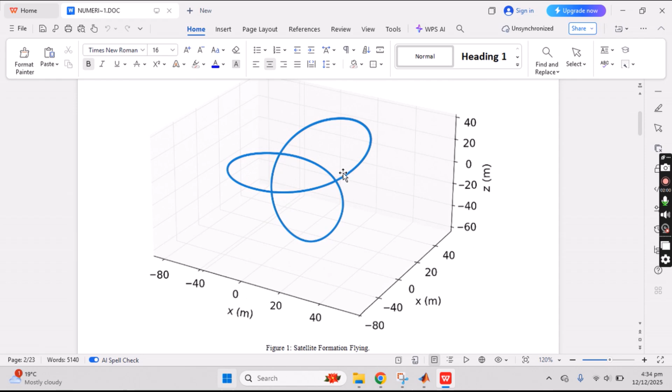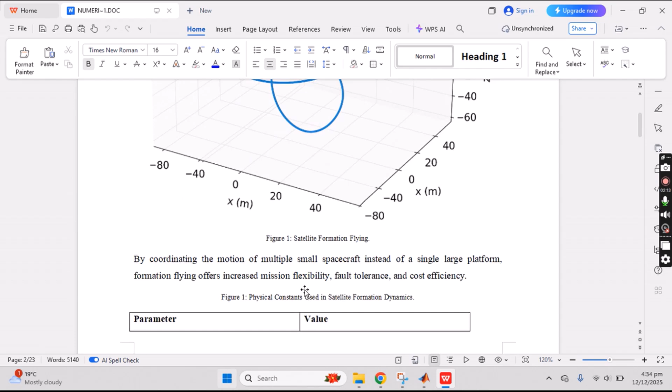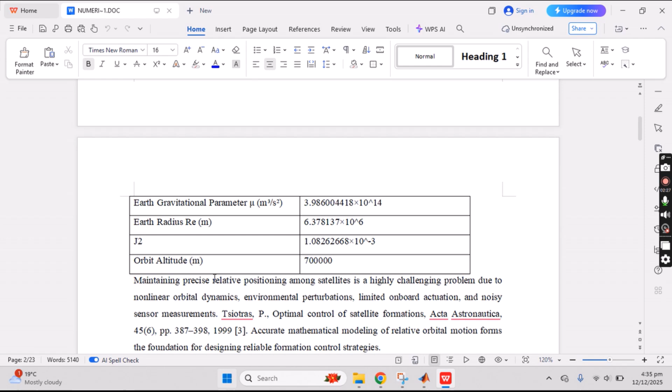The introduction basically provides us the relative motion for satellite formation flying. The satellite is moving in what we call relative motion, and this is basically a circular movement around this type of circle. So here I have defined the physical constants used in the satellite formation, parameters like the orbital altitude, the radius of Earth, the gravitational parameter, the J2 constant, and the Hill-Clohessy-Wiltshire state matrix is defined as well.

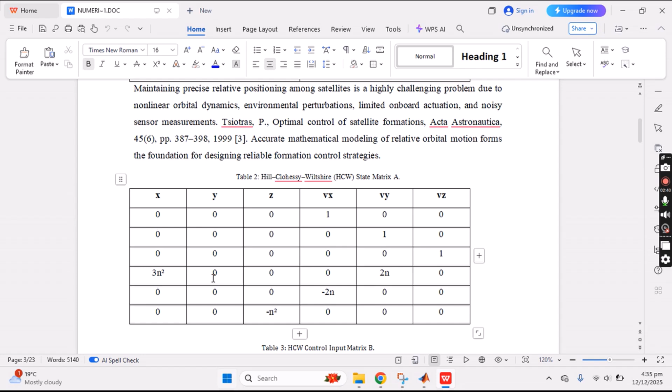So next one is basically the HCW control input matrix, defined in the column with its parameters as well. Hill-Clohessy-Wiltshire is commonly employed to describe the linearization of relative dynamics about a circular reference orbit. So next one is, just a second. Okay.

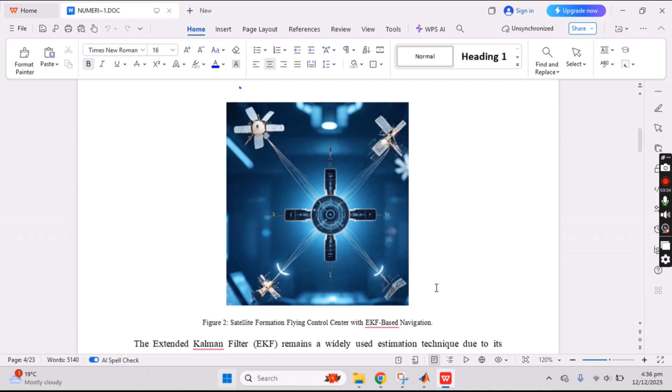So here is the satellite formation flying control with EKF-based navigation. Basically the EKF is a widely used estimation technique due to its computational efficiency and capacity to handle nonlinear measurement models. And here is the background and motivation for model predictive control: orbital perturbations, gravitational non-uniformities, differential drag, and atmospheric effects continuously disturb relative motion dynamics, with estimation challenges as well, which is related to low Earth orbits and remains standard in many control studies.

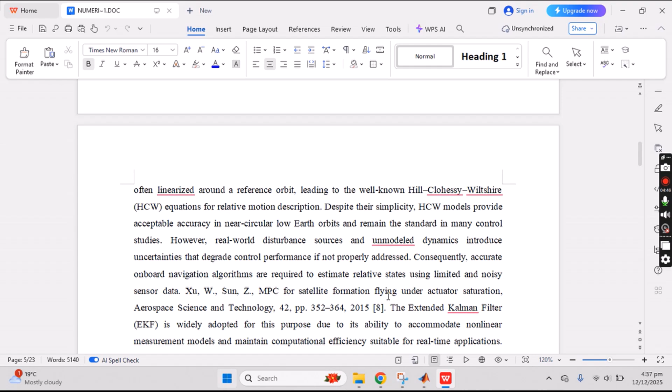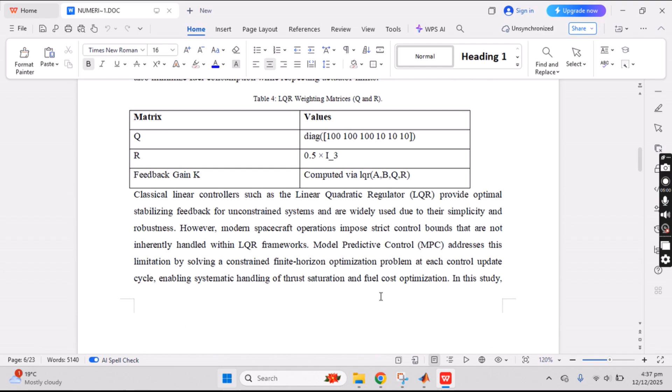And we discuss how real-world disturbance sources and unmodeled dynamics introduce uncertainties that degrade control performance if not properly addressed. So here are the control strategies and study objectives. These are the LQR weighting matrices, LQR meaning linear quadratic regulator, and the simulation framework development, in which I have added the closed-loop architecture that links the estimator outputs directly to the MPC and LQR controllers, plus performance metrics and evaluation.

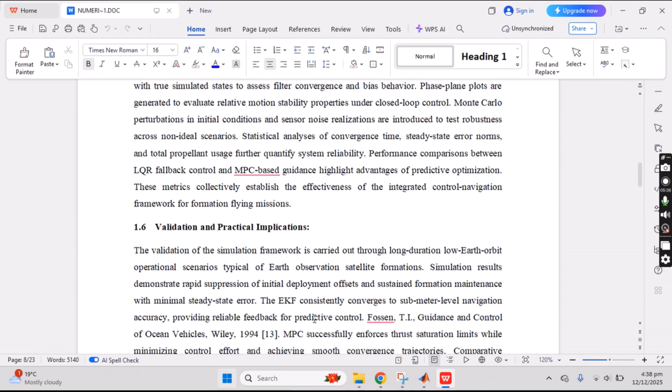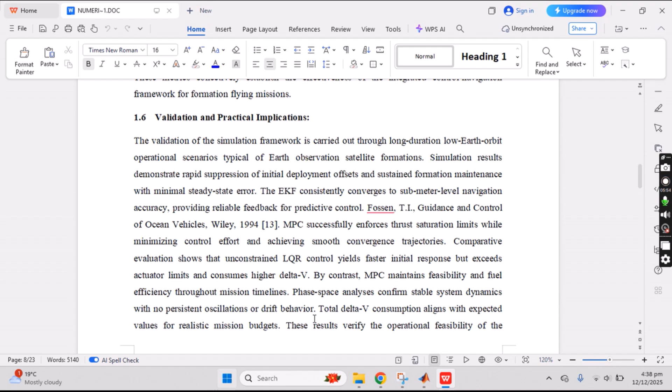So here I have defined the performance comparison between the LQR fallback control and MPC-based guidance to highlight the advantages of predictive optimization. Validation and practical implications basically define how the EKF consistently converges to sub-meter-level navigation accuracy, providing reliable feedback for predictive control.

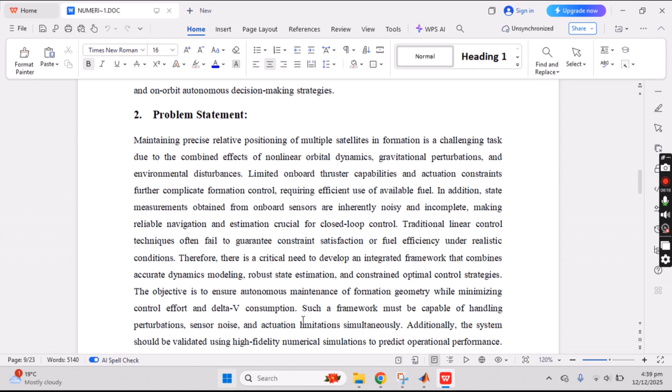So the problem statement is basically that maintaining precise relative positioning for multiple satellites in formation is a challenging task due to the combined effects of nonlinear orbital dynamics, gravitational perturbations, and environmental disturbances. Therefore, there is a critical need to develop an integrated framework that combines accurate dynamics modeling, robust state estimation, and constrained optimal control strategies.

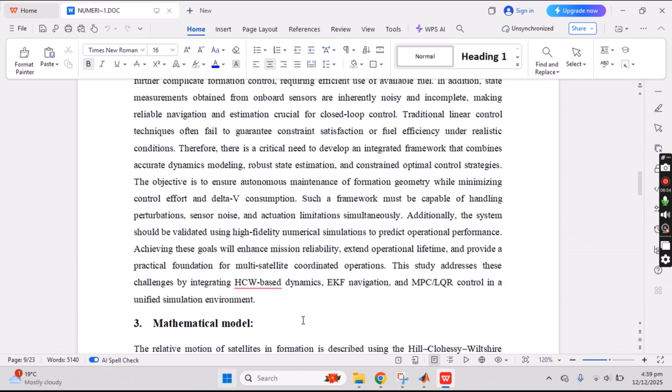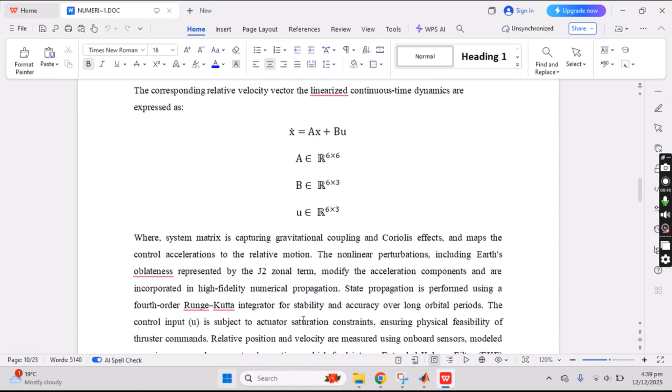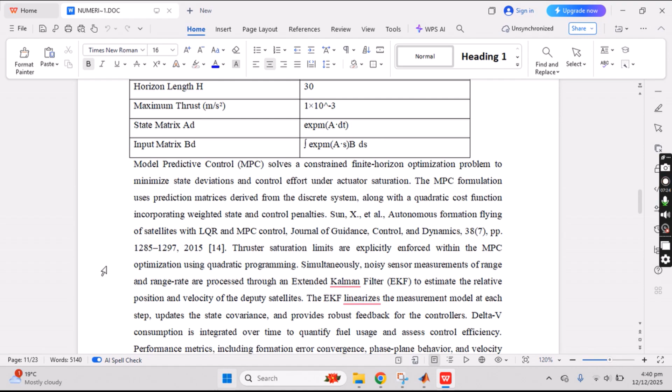Here's the mathematical model which we have defined according to the dynamics of a circular orbit. Here are the complete equations used in the linearized continuous-time dynamics. And the methodology defines the linear quadratic regulator as the stabilizing feedback baseline, and the MPC parameters are provided in the form of a table. MPC basically solves a constrained finite-horizon optimization problem to minimize the state deviation as well as the control effort under actuator saturation.

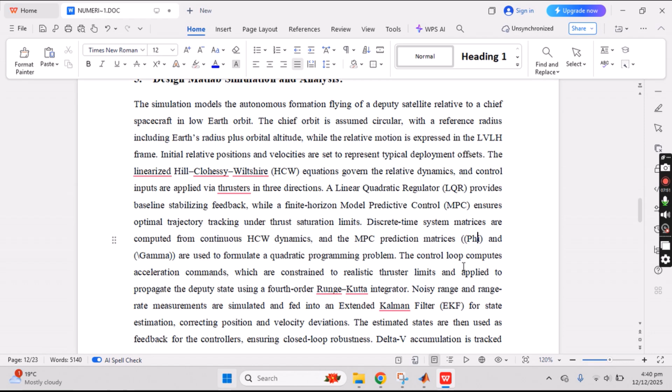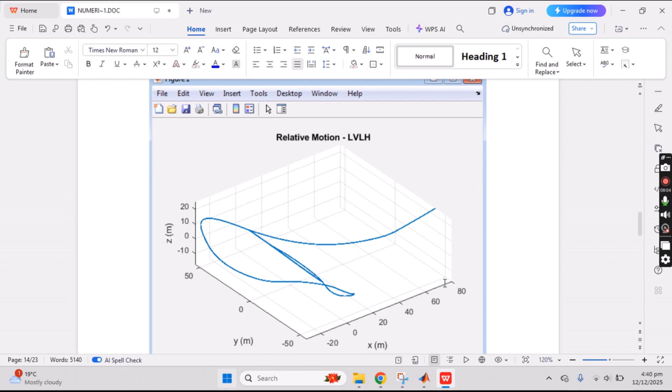So here is the MATLAB simulation design and analysis, in which I have defined the complete LQR method, which stabilizes the feedback, while a finite-horizon model predictive control ensures optimal trajectory tracking through the matrices. Here is phi. We need to consider the phi and gamma values, the EKF, the Runge-Kutta method, as well as the LQR methods. So here is the relative motion of the satellite, providing the output trajectory results in MATLAB.

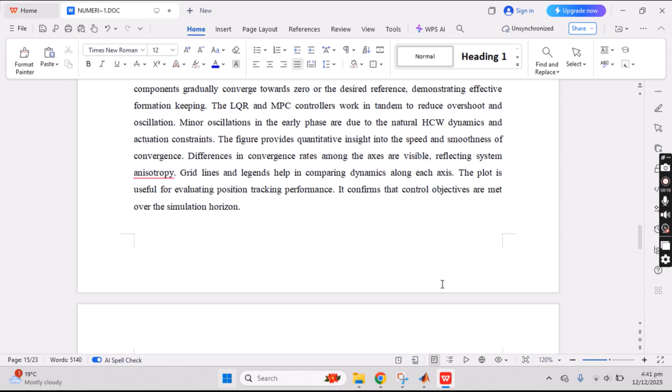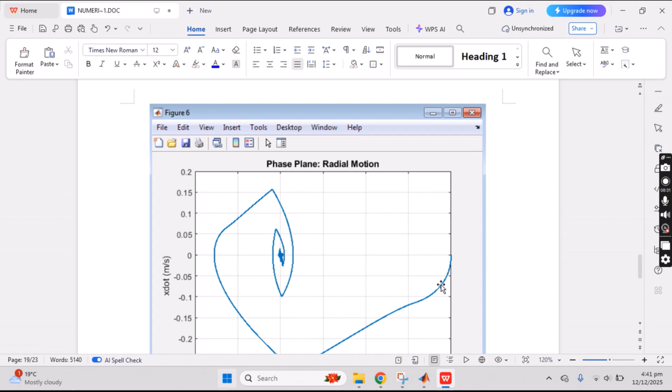Next one is relative position versus time, as the MPC controllers work in tandem to reduce overshoot and oscillations, then relative velocity and the thruster commands as well. Formation distance error, and this one is the phase plane radial motion, and then results and discussion with the EKF configuration parameters, and the conclusion and references.

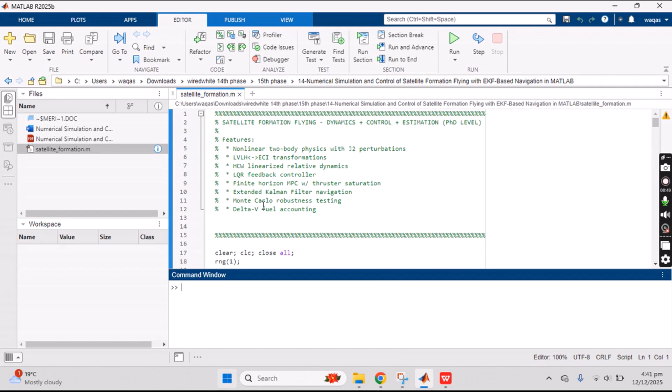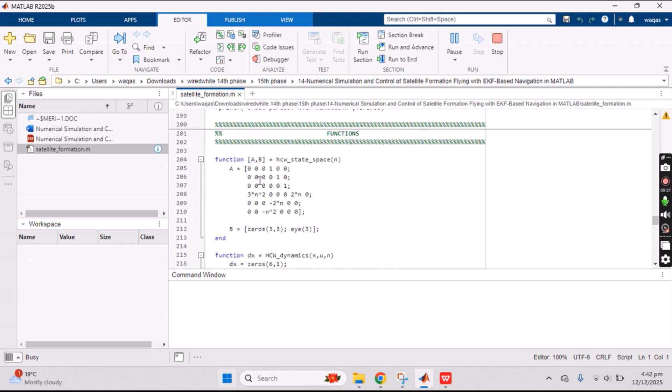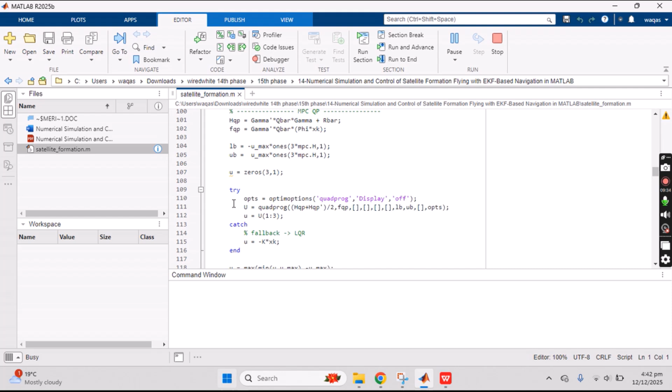Let me show you the MATLAB demonstration of how satellite formation flying is developed in MATLAB and how we get the output results. These are the MATLAB functions defined. Always make sure all the MATLAB functions are defined at the bottom of the code, because the functions will only be called and used during the code, but when we define a function in the middle of the code, it will give us an error while running MATLAB. So that's why we need to put all the functions at the bottom of the MATLAB code. So let's wait and then we will get the output results.

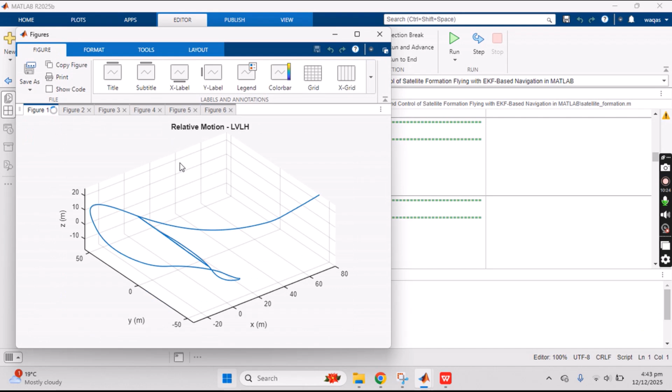See the total change in velocity, final position error, and orbit period as well. Okay, so here are the output results. Let me show you. This is the relative motion. This is the relative position output graph, relative velocity, thruster commands, formation distance error, and the phase plane radial motion with x dot in meters per second. x dot is basically speed.